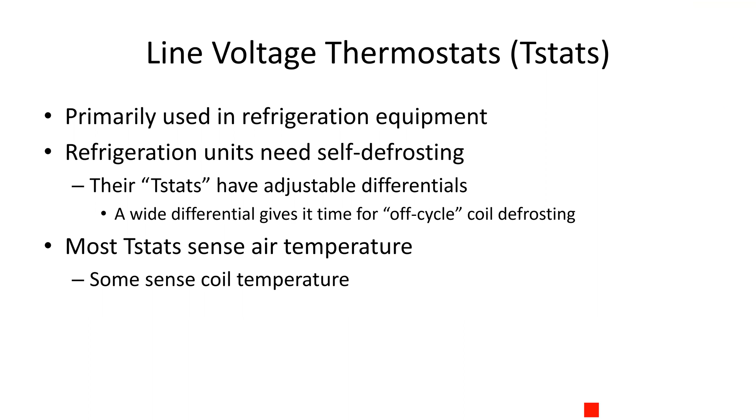So what it'll do is it'll cut in at 40. So once the temperature gets up to 40, it'll close and open your solenoid. And once it gets down to 35, it'll open that switch and disengage the solenoid, and then therefore pump down your compressor and all that good stuff.

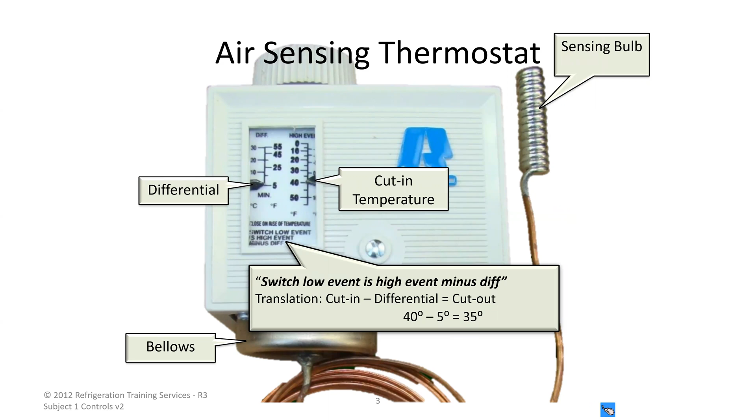And that's saying that the box is at 35 degrees? Right, so the 35 is the low event. So once the box gets down to 35, this will open back up and close your solenoid valve. Okay, so that 35 is box temperature. Well yeah, that's the low event, that's the cutout. So once the box gets down to 35, it'll open. Once the box gets up to 40, it'll close. So it's got a 5-degree swing.

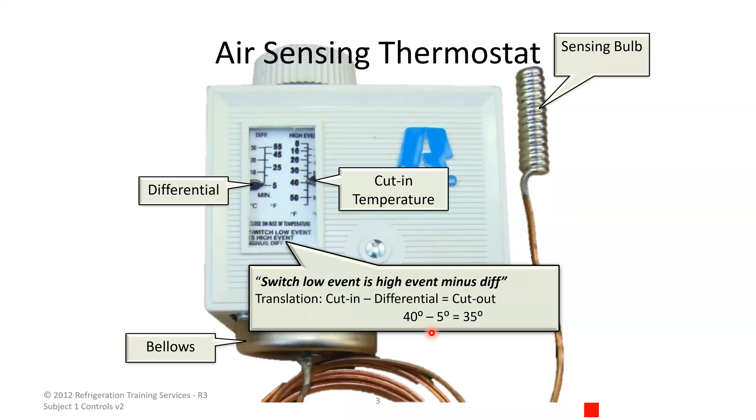Adjusting your commercial thermostat, you set the cut-in temperature first, or your high event, then you set your differential, and that gives you what your cutout is, your cut-in minus differential.

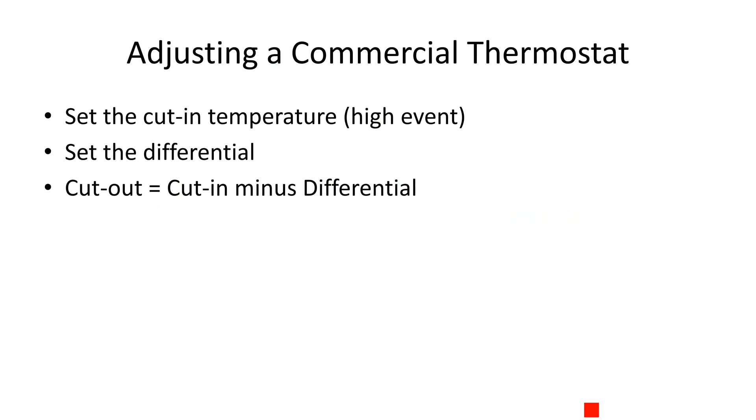An air sensing thermostat again here shows you kind of the slider, how they're setting it. Set that to 40 first, and then set your differential down to 5. And that gives you a 35-degree low event, so the box won't go below 35.

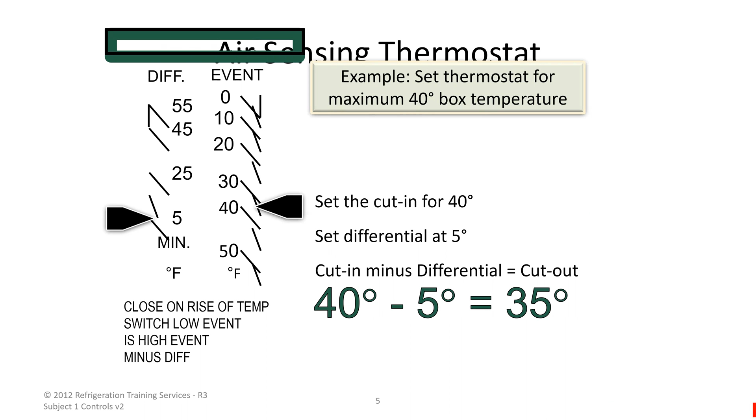This is a little diagram just kind of showing you the temperature swing. Goes from 40 down to 35, cuts out. And it's going to show you your evaporator temperature. Your evaporator temperature is usually about 20 degrees colder, 15, 20, something like that.

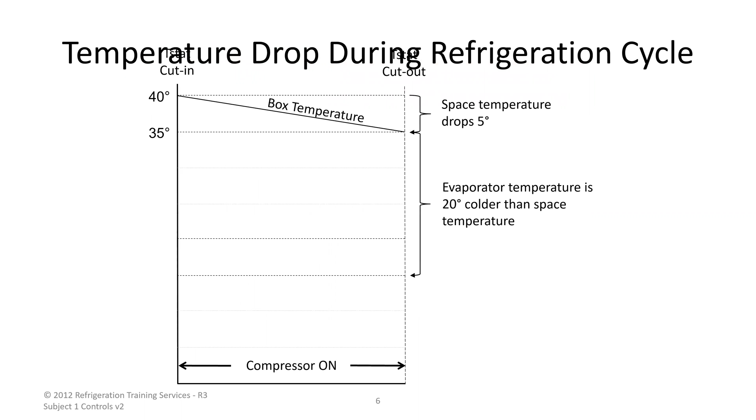Evaporator temperature drops with the space temperature. For an off-cycle defrost, it's typically what they use in medium temp, 35 to 40. When your compressor is running, the coil temperature is below freezing, remember, because it's 15 to 20 degrees lower than the box temp. So therefore, frost begins to build.

And when the compressor cycles off, in an off-cycle defrost, your fans will stay on, circulating the air through the coil. The coil rises above 32, and the frost will start to melt.

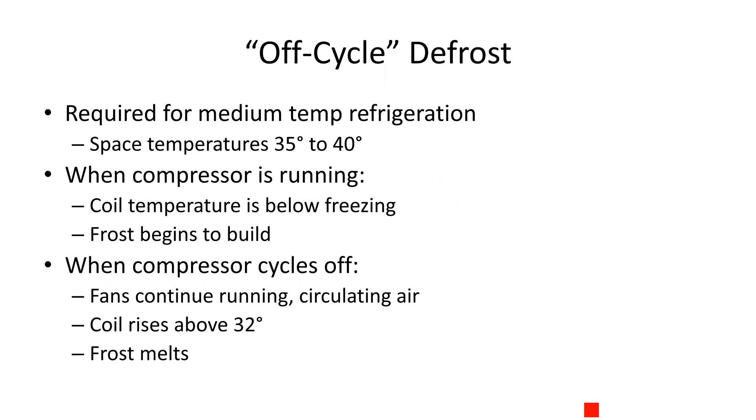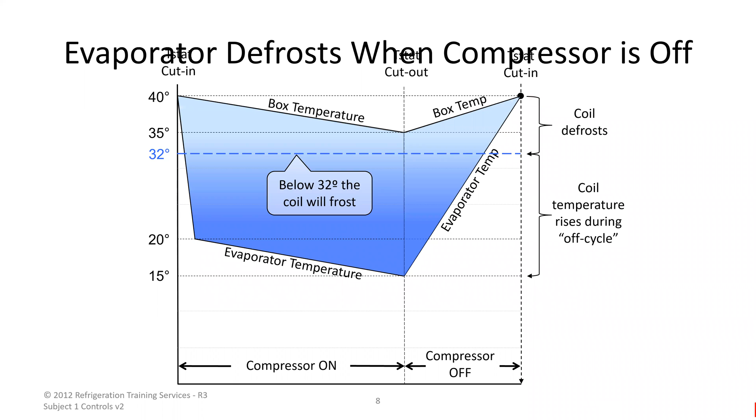This just shows you that same diagram we were looking at with the defrost side added onto it. 32 is the frost line. Below that, the coil will frost, compressor shuts off, temperature will come up, typically to about 40 to 45 degrees before the timeout, and then it will resume refrigeration.

Another style is a coil temperature sensing thermostat. The T-stat bulb is mounted in the evaporator fins, responds to the evaporator temperature, not the air temperature. Coil temperature drops as box cools, because there's less heat to remove, or less heat in the box.

Frost forms on your tubing, the T-stat shuts off the compressor, and the compressor stays off until the coil is defrosted. The primary advantage of coil sensing T-stats is it allows the coil to completely defrost before the compressor starts.

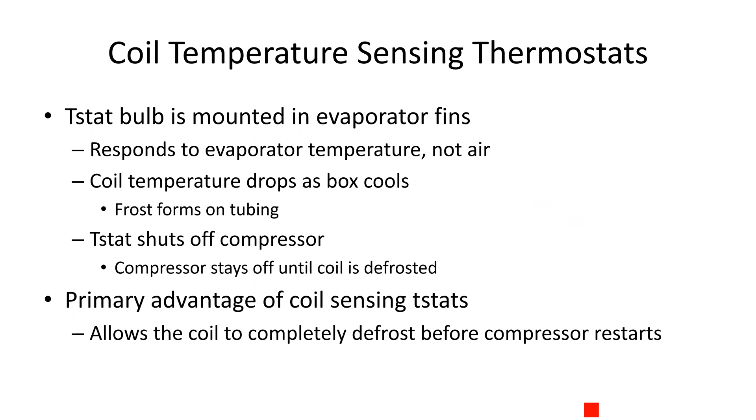And you know why they say that, why it allows it to completely defrost? Because with that bulb shoved in the coil, it's sensing the temperature of that coil, just like it shows right here. And it's not going to close again until the coil's warm enough, and there won't be any frost left on it. They are nice for that.

You'll see this, not this exact style, but you'll see some similar to this in a lot of our prep tables, condiment bars, that kind of stuff. We see it in C-stores and whatnot.

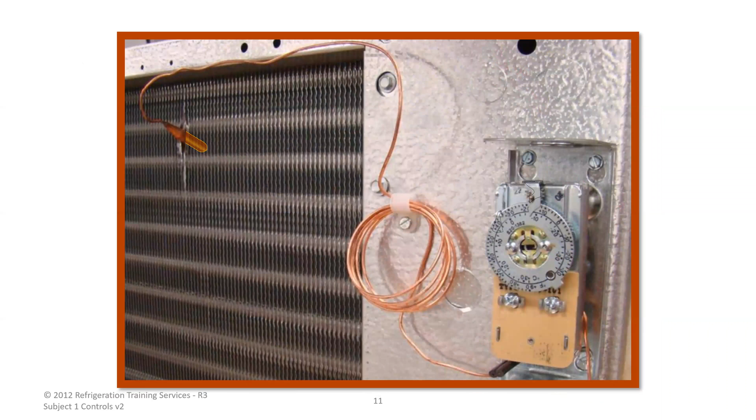Typically they're set pretty, you know, there's not really any adjustments you can make for the most part, other than just changing the temperature. The differential is usually preset in this style. This one, for instance, has got a 35-degree cut in and a 20-degree cut out. So once that coil gets down to 20 degrees, it's going to open that back up, shut, and close your solenoid.

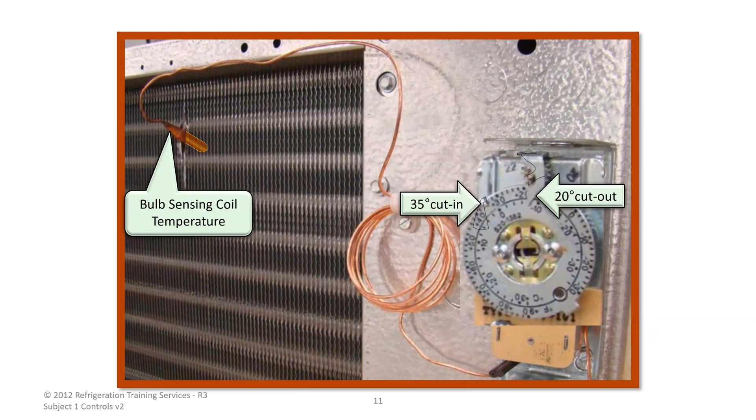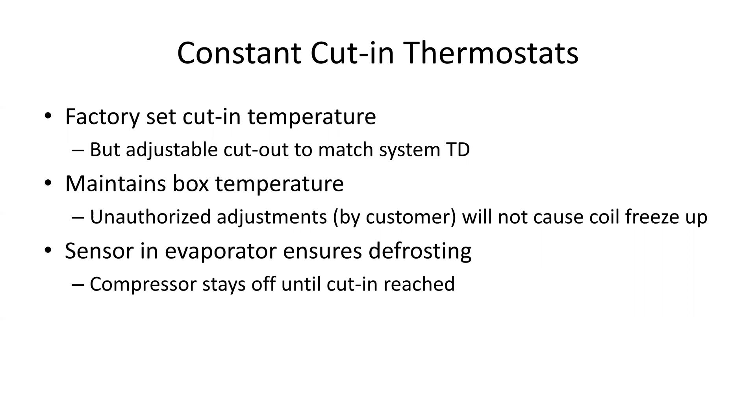A constant cut-in thermostat has a factory cut-in temperature, but it's an adjustable cutout to match your system TD. It maintains your box temperature, and when the customer goes in and starts turning that dial up and down, it's not going to cause icing issues because the high event is already set from the manufacturer. They do have an adjustment screw on some of them to change for altitude. If you're in a higher or lower altitude, you need to watch for that, since altitude changes the pressure in that thermostat, and if you don't adjust for your location, you can have some issues.

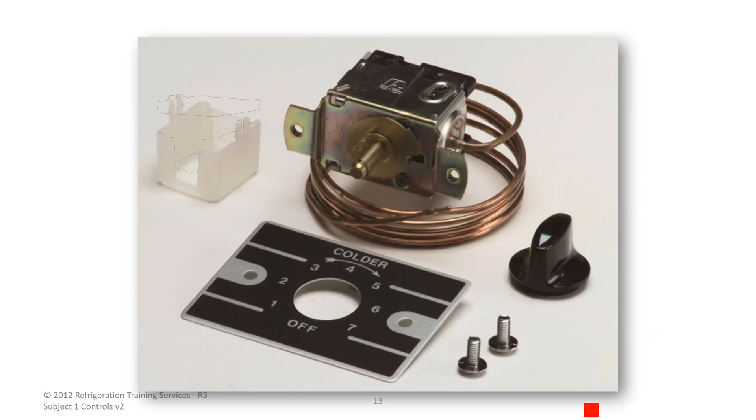How do you find out our altitude? How do you find out your altitude? Yeah, we have to Google it. Yeah, I would just Google it. Just Google what's the altitude in whatever city you're in. Okay, let me find that out right now.

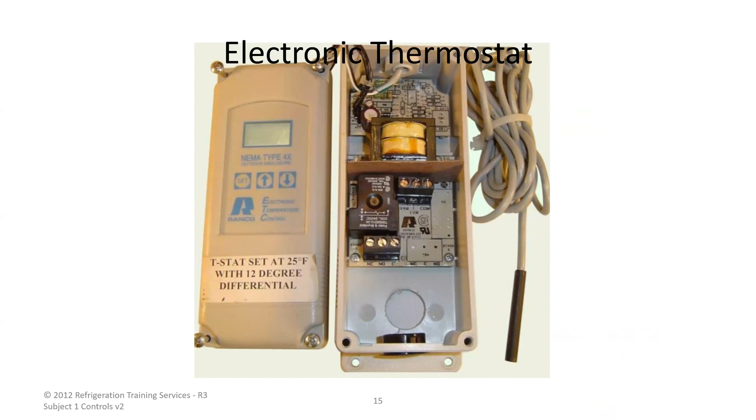These have a programmable differential in them, which you can set. Some of them have a programmable defrost in them too. If you're just doing an off cycle, you can set that up in here. These ones are pretty nice.

One thing I will say about these thermistors is if you ever want to check the accuracy of them, to see if it's reading the correct temperature, you can take that thermistor and get a cup of ice, fill it all the way to the top with ice and cold water, stir it around, and stick that thermistor right in the ice. It should read pretty close to 32, within a degree up or down.

If it's way off, you've got a bad thermistor, and at that point you just replace the whole thing. I have had guys in the past replace this thermistor with just a regular green lead sensor, but they're two totally different things. The green lead sensors are a 10K sensor, kind of a fixed thing. Whereas this thermistor is more like a 35 or 40K. So make sure we don't use those. If you're trying to troubleshoot that, just replace the whole thing.

Pressure controls stop and start the electrical current flow, energizing or de-energizing refrigeration components by switching the arrangement of pressure controls. You have two different types: an open on fall, which is your low pressure, low ambient fan control, or an oil safety switch; and an opens on rise, which would be a high pressure safety control.

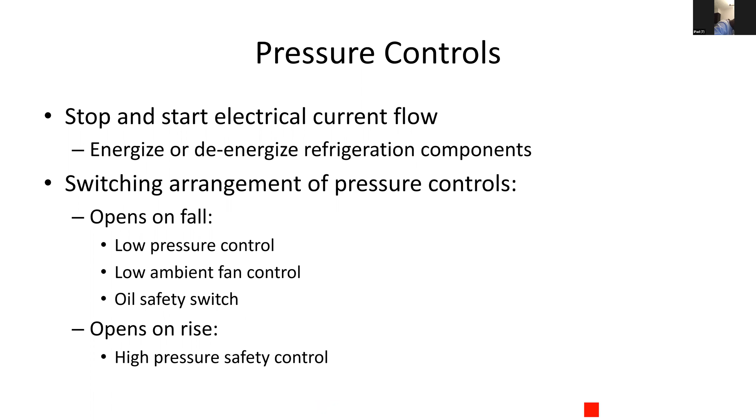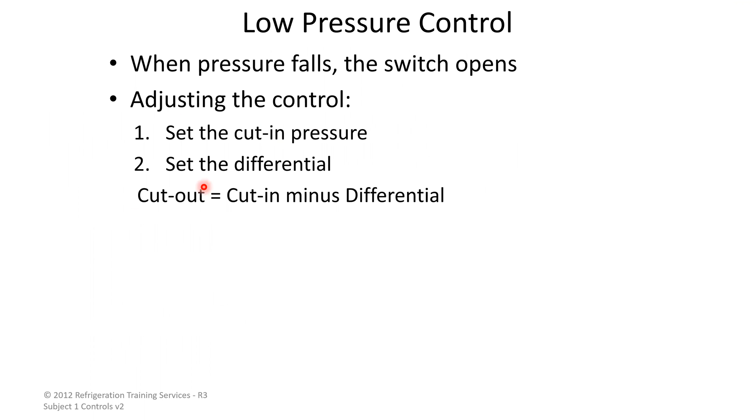So for a low pressure control, when the pressure falls, the switch opens. Adjusting it is just like that temperature control: you set your cut-in pressure and you set your differential. The cutout is your cut-in minus your differential. So if you take a look, yep, it shows it right here.

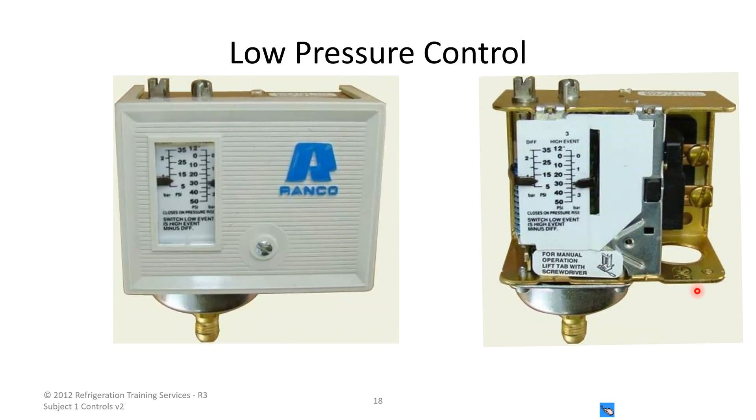Now, these aren't always 100% accurate. So if you're installing a new one or if you have an issue with one and you want to know if it's working correctly, the best way is to gauge up on your low side and then either valve off your receiver or your liquid line and pump it down, and actually look at your gauges and see what the compressor is shutting off at. You want to make sure it's accurate, and do it a few times to make sure it's the same every time. If it's shutting off at 20 pounds, then next time at 15, then next time at 25, you've got a bad pressure control, replace it.

Now, if it's shutting off at 15 on your gauges, but it should be shutting off at 20, but it's shutting off at 15 every time, that's fine. It's just this thing's a little off. So don't worry about that.

A lot of these low pressure controls in this style, if you look over on the left side underneath this spring, you can take your service screwdriver and stick it in there. You can actually do this instead of pushing in the contactor if you're trying to pump down a unit. So you can use this to pump down your compressor instead, just by prying that up with a little screwdriver — stick it right underneath that little spring and pop it up a little bit. It's another good way to easily tell if it's your low pressure control that's holding your compressor out or if it's something else.

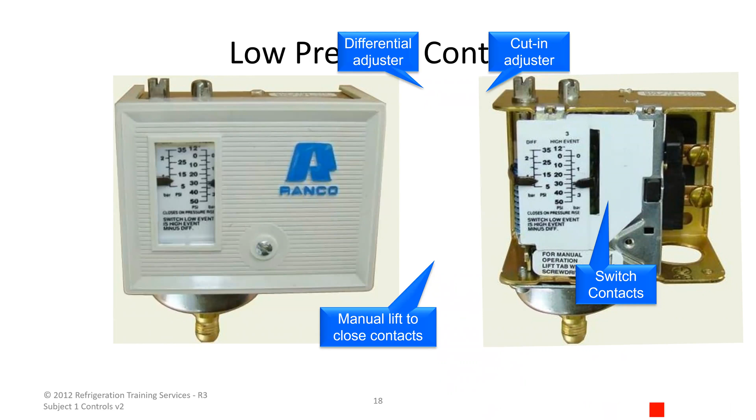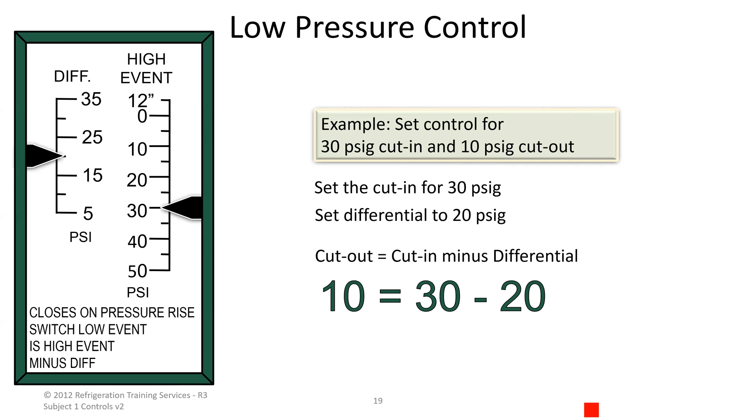This will show you a diagram of the low pressure control, setting it. You want to set the cut-in for 30, differential to 20. That's going to give you a 10 PSI cutout.

Setting your low pressure controls, you want to follow your manufacturer recommendations. If your cutout's too low, if you're pulling down into a vacuum or trying to pull it down to 0, when that compressor is not designed to do that, you can overheat your compressor and cause some damage. If your differential's too close, it's going to cause some short cycling. If you only have a 5-degree or 5-pound swing, that compressor is going to turn on and off a whole bunch of times while it's in defrost or satisfied on temperature, just because you have that too close.

Outdoor units are affected by low ambient. The cut-in must be just above your lowest ambient. So another thing you could go to Google for — just Google what's the lowest ambient in Salt Lake City or Phoenix or wherever — and you want to kind of go off of that.

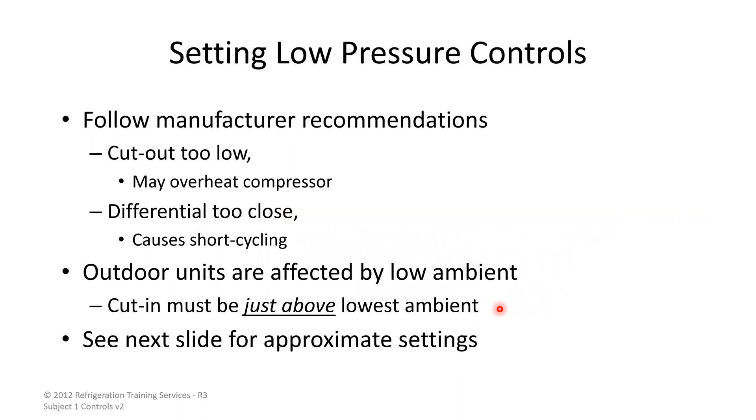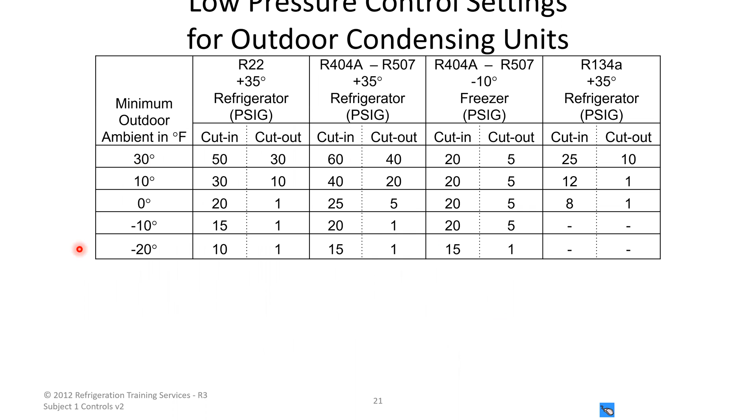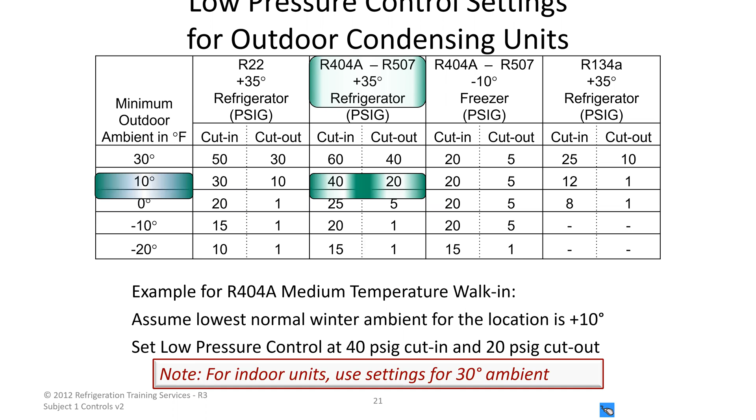Every low pressure control new in the box comes with one of these. If you don't have one, they're easy to find online. This is going to show you an example: for R404 medium temp walk-in with a lowest winter ambient 10 degrees above, positive 10, you're going to set that with your low pressure control at 40 PSI cut-in and a 20 PSI cutout. For indoor, you want to go with 30 degree lowest ambient, just because that's the highest one there is.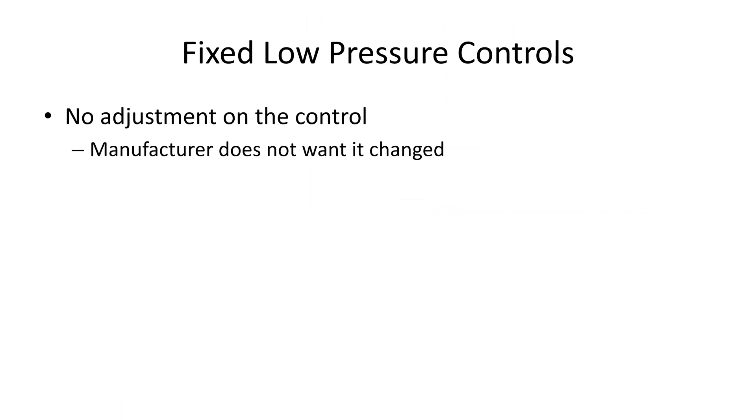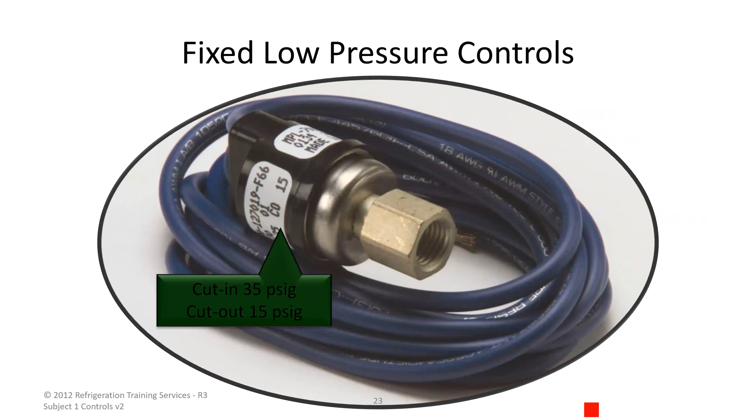A fixed low pressure control, or an encapsulated one, has no adjustment on the control. The manufacturer doesn't want it changed — it's just set for whatever it is. The only way to test these is to take the wires off of wherever they go to and test them for continuity. If you get continuity, that means it's closed and that's not your problem. They're preset, like I said, no adjustments can be made — it is what it is. I personally don't like these ones. If you have to replace a bad one, I would go get a mechanical one, unless you have one of these on your van, then go for it.

You can use low pressure controls also to control temperature, because in our business, pressure is temperature. Used on some indoor reach-in refrigerators. You want to check with your manufacturer for the settings, but the general rule of thumb, a control cut-in would be at a pressure equal to the desired box temp. And that's only if we don't have a stat on the truck and we just use that to control the temperature for the time being.

You only want to do this on indoor units. If it doesn't already have this type of control set up, don't add it. But some units use this to control their temperature — not very many, it's not very common. When you say control, you mean self-contained? Yeah, self-contained little stuff like little one-door reach-in fridges or something like that is typically what you see with no split.

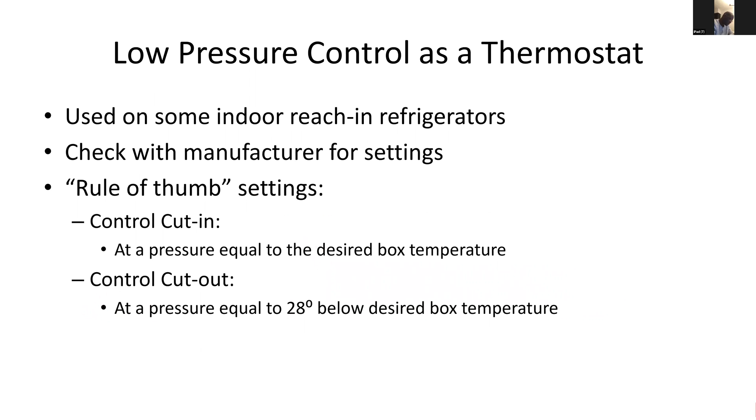It works kind of the same way, it's just using pressure instead of temperature. So at 33 PSI on 134, you're going to have a 38 degree box temp. Evaporator temp is going to be quite a bit lower, obviously. 12 PSI would give you a 10 degree evaporator. When the compressor shuts off, same thing, it just goes off of the pressure. Once the pressure gets up, it'll kick it back on.

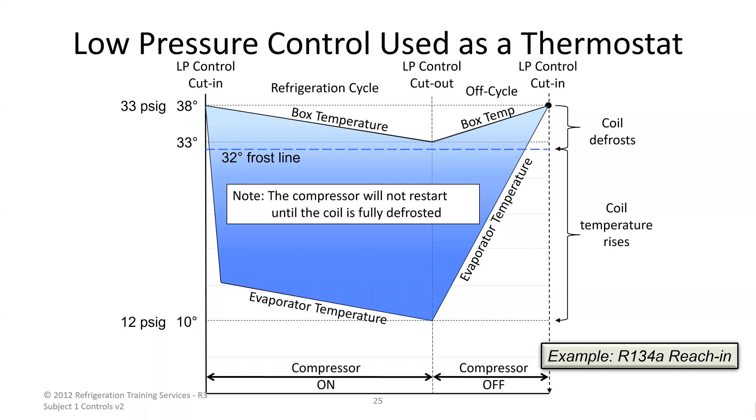Not very common, but they are out there. Benefits of using a low pressure control for temperature: one control, three functions. Controls the box temp, ensures proper defrost, and it's a low pressure safety for the compressor.

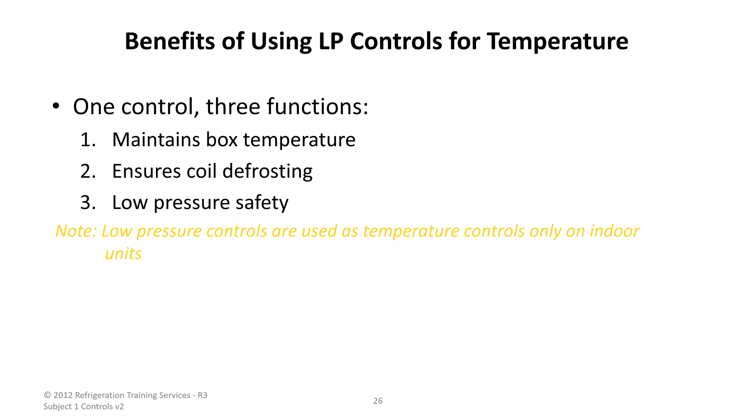Your high pressure control opens the compressor circuit on pressure rise. So setting your control cutout, you want to check with the manufacturer, or your rule of thumb is 155 degree condensing temperature. So R134, you'd be at 283 cutout, R22 you'd be 382, 404 you'd be 427.

But this is also very susceptible to where you live. Now up here, typically for 404, we have our high pressure safety cutout set for about 350 to 375. Now down in Phoenix and Vegas, where you guys are at, your temperatures are going to get a lot higher, so your pressures are going to be more in the 400 range.

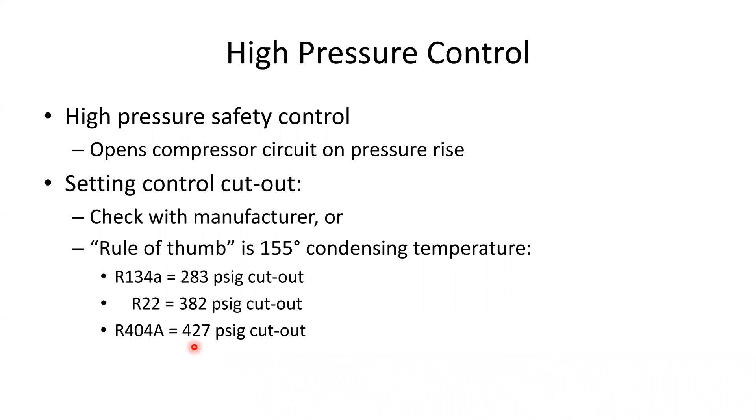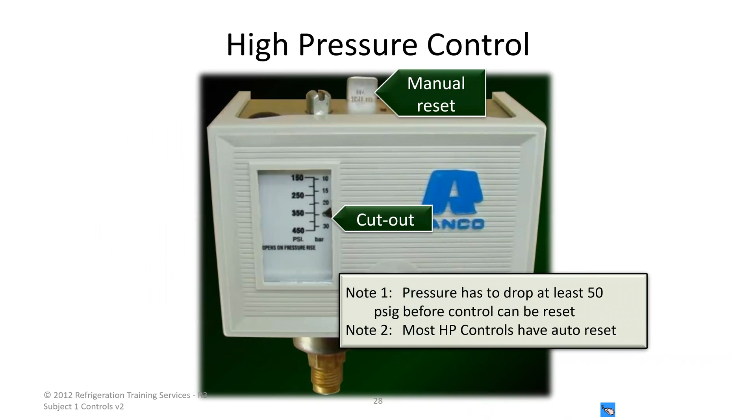High pressure controls, some of them have a manual reset, most are automatic. Typically they only have one slider on them. If it's just a high pressure cutout, they don't have a slider for the differential. You set it where you want it, and that's it.

You can test these things the same way you test the low pressure: gauge up to your high side, either disable your condenser fan motor, or you can take the top off of the unit and cover up the condenser to raise the pressure also.

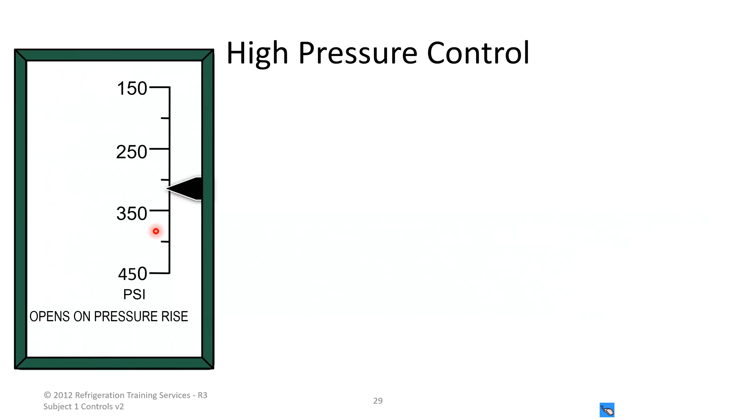If it's the middle of summer and it's 120 degrees outside, don't worry about it. Just set it where you think it should be, 350, 375, 400, and call it good. We don't want to try to raise the pressure when the temperature's already hot as hell outside. It's just causing unnecessary stress on the compressor.

Most of the automatic reset ones have a 50 PSI swing in them. So if I have my high pressure cutout set at 350, the automatic reset is not going to kick in until it gets down to 300.

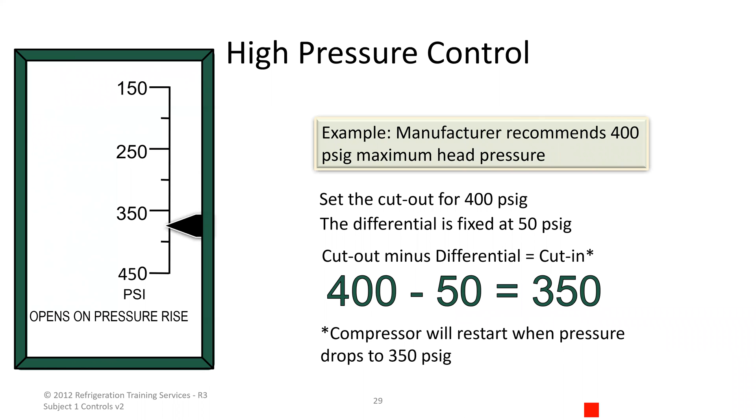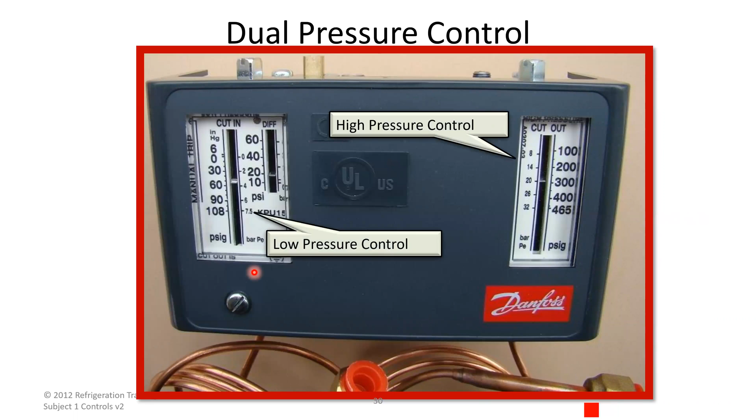Obviously, we want to go off the PSI side, not the bar. Low ambient is when your condensing temperature drops below 90. Why don't we want low ambient? It lowers your condensing pressure. Low liquid pressure affects your metering device. You get flashing, you get a starving evaporator, it can cause icing issues.

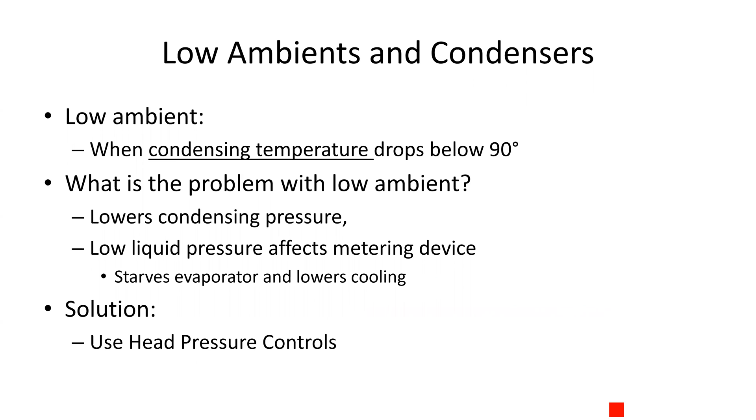If it's flashing out of your metering device, whether it be a TXV or a cap tube or something like that, the solution is to use a head pressure control, whether it be a headmaster or a fan cycling control. Dampers are an option, though you don't really see those. Flooding, we'll cover that on a later topic, flooded condensers.

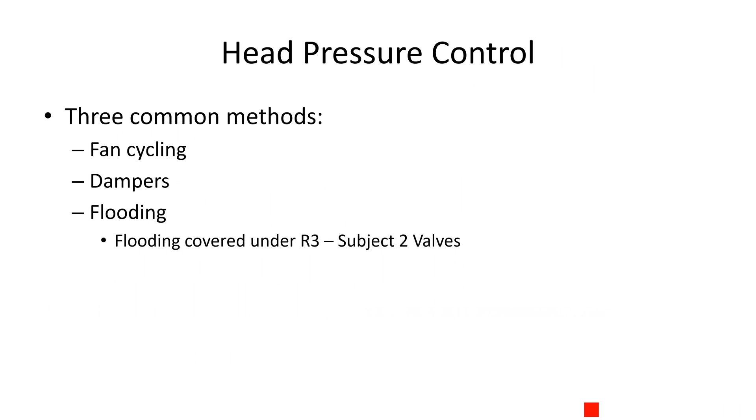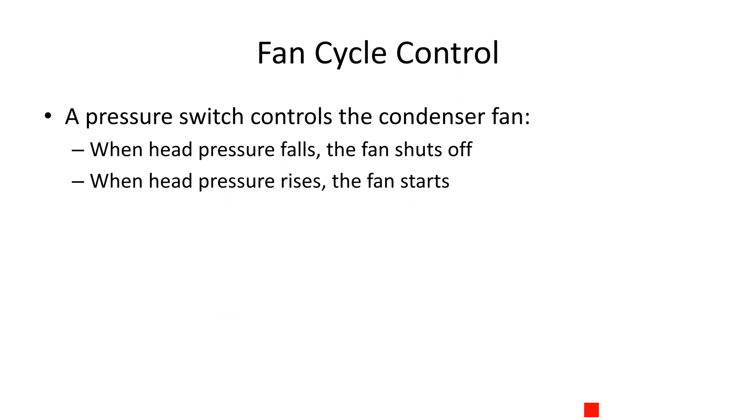Fan cycle controls is a pressure switch that controls the condenser fan. When the head pressure falls, the fan shuts off. When the head pressure rises, the fan starts. So instead of using a headmaster, in most applications you can actually use both, but typically you see one or the other. So when the head pressure starts to get too low, it'll cut the power to that fan to try to bring it up. And once it gets up high enough to where we want it, it'll give power back to that fan.

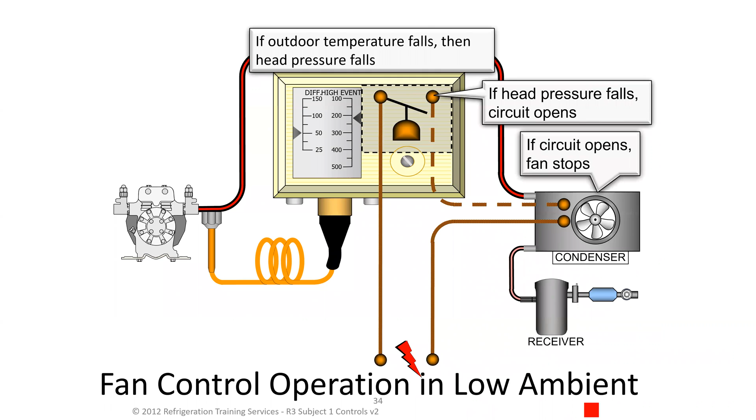Everybody following along with that? Understand how they work? Mm-hmm.

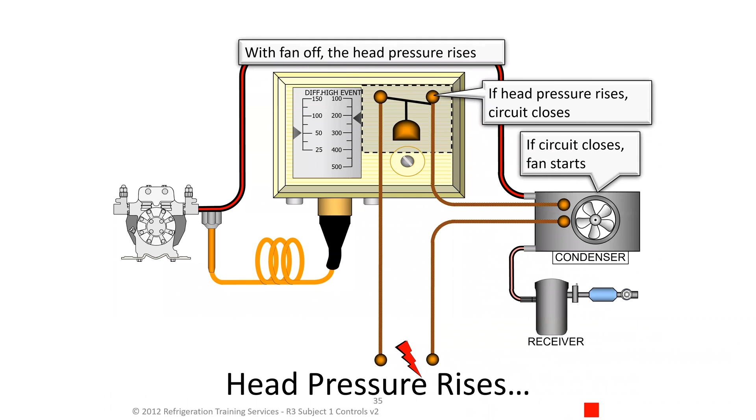Now, a fan cycle control and a head pressure control are two totally different things. One closes on rise, one opens on rise. You need to make very sure if you're replacing one or if you're going to install one. If you're getting it for fan cycle control, you want it to open on the fall, so that would be a close on rise. So when the pressure goes up, you want it to close so your fan will come on. If you put a high pressure control in there, it's going to do the exact opposite. When that pressure gets higher, it's going to cut power to your fan. And you'll be back there real quick.

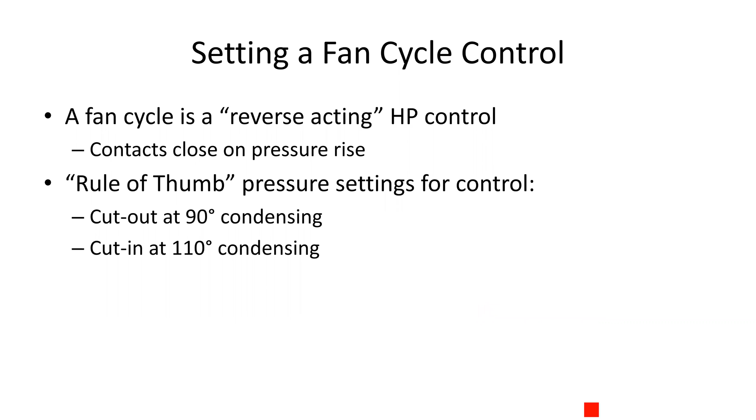Adjusting a fan cycle control is just like adjusting the others. You've got to know what you're dealing with, what kind of gas it is, what proper condensing temperatures and pressures are, what you want it set at. Your high event cut in for R22 is 225 or 110 degrees, and your low event is 170 or 90. That's the goal where we want to keep our condenser. It doesn't always happen that way, but that's what we'd like it to be. Everything we can do to help that is beneficial.

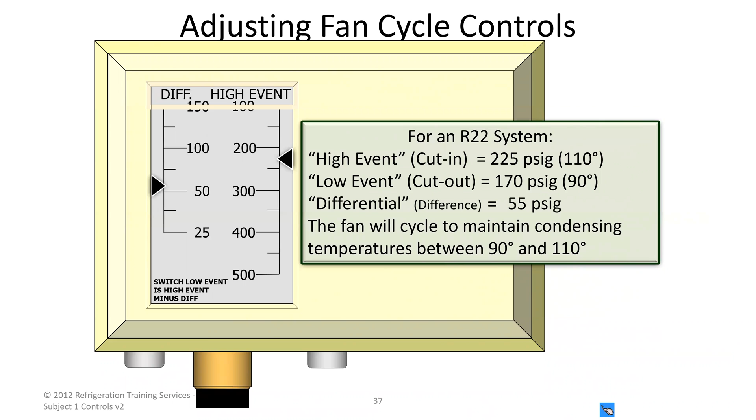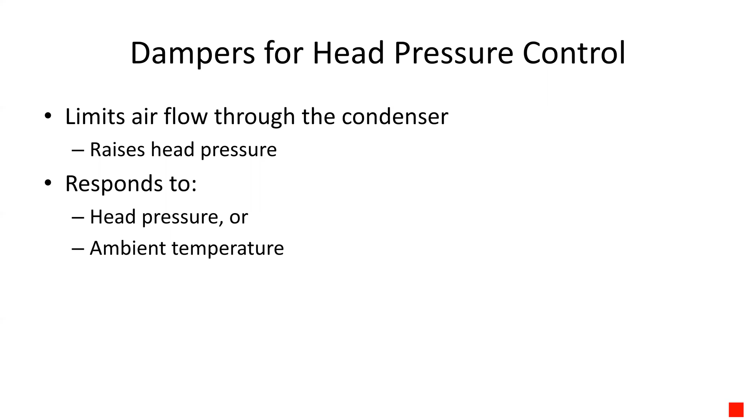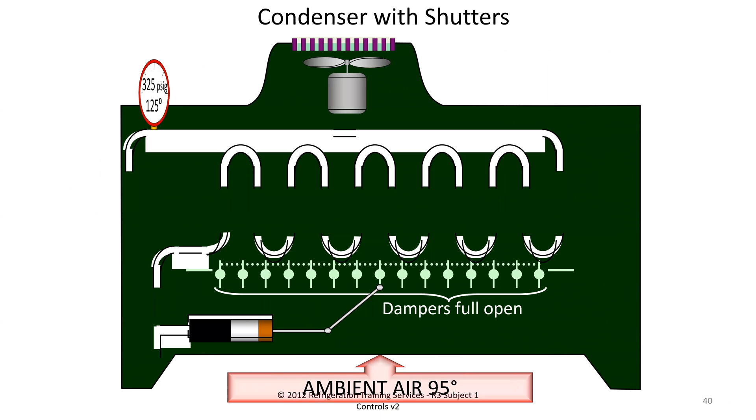Dampers for head pressure control are essentially like what I was just talking about, you can take the cover off of the unit and cover up your condenser. It's the same thing, these are just automatic ones. So these little things right here, when the head pressure gets too low, they'll turn and close. The fan stays on, this will just close and restrict that airflow. You don't really see these though, I think I've only seen one, and it was not in operation. It was at an old shop.

You guys, what about you, Selvin, or anybody else out there? Have you seen one of these before or dealt with one? Now that I think about it, I've never seen one.

Yeah, they're not really common, they don't make them anymore. They're not doing this anymore. Nowadays, things are going to modulation. They're changing, instead of turning things off and on or a fan cycle control or dampers, they're doing variable speed motors or ECM motors.

A VFD, or variable frequency drive, is what they're using now. They'll speed up and slow down the condenser fan motor instead of starting and stopping it, for two reasons. It's a lot better for the motor, a lot less wear and tear. It's a lot easier for it to slow down and speed up than it is to start and stop, and energy consumption.

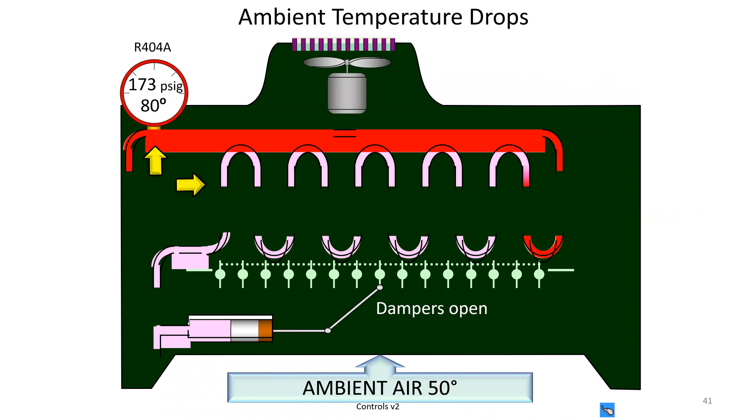It uses a hell of a lot less power to just speed it up a little bit than it does to start a motor, especially some of these big ones you get, where the fan's like a 2.5 foot diameter fan blade.

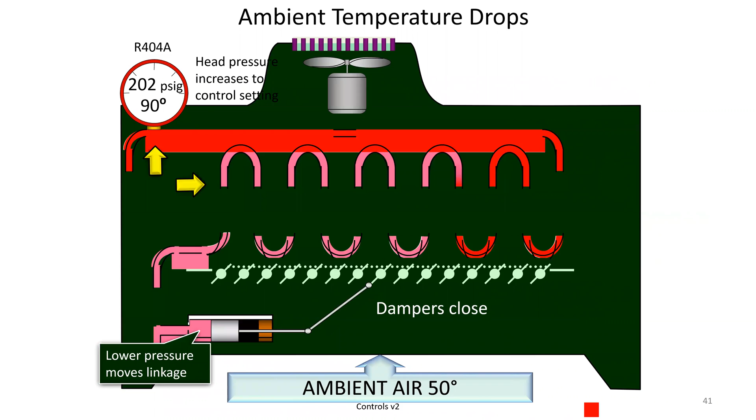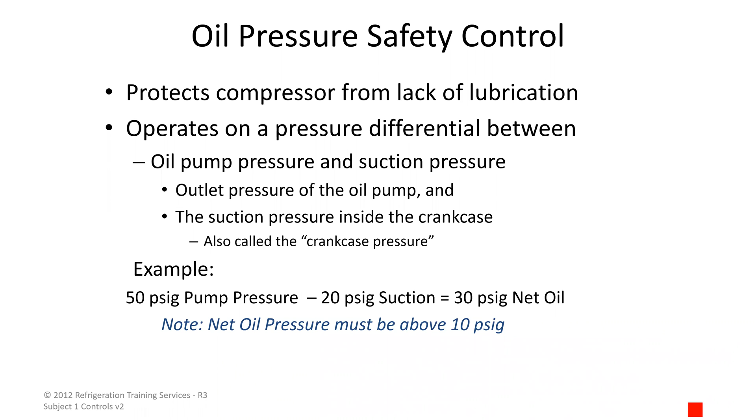So anytime you're working on a compressor rack or something, and you call Jim or me or Eric or Selvin or whoever for help, that's probably going to be one of the first things they ask you if you're dealing with oil problems, is what's your oil net.

The easiest way to check that, you see this is your oil pump here on the front of the compressor, and right here you have a little T coming off. Now, one of these has a strainer, the other does not. Just loosen the cap a little bit, it's usually this one that doesn't. You just take that cap off, hook up your low side gauge to it, hook up your other gauge to the back side of the compressor on the suction, and you should have at least a 10-pound difference between the two. This should be at least 10 pounds higher than your suction pressure. You really want it to be more like 30.

Okay, so pump oil pressure should be higher than suction pressure at all times. Right, yep, on a rack, on a compressor.

Correct. And the reason we check the oil net, because it tells you quite a few things right off the bat. It tells you if the pump is turning, for one, and then it also tells you if you have a plugged inlet screen, or pickup screen, in the bottom of the compressor, or on the oil pot. This one doesn't have a picture of it, but usually on this side or on the other side, you'll have a little oil pot with a float in it, and based on the level of that float, it opens and closes and lets more oil into the compressor. There's also a box they have on the side. Right, yep, there's also another screen on the inlet side of it that can get plugged as well.

So a couple easy things to check, and you can pretty much tell which one it is just by checking your oil net.

These oil pressure controls are a little outdated. They're not really around anymore, but on some older stores you might see them. This is typically the one we see, the Sentronic or the Sentronic 2.

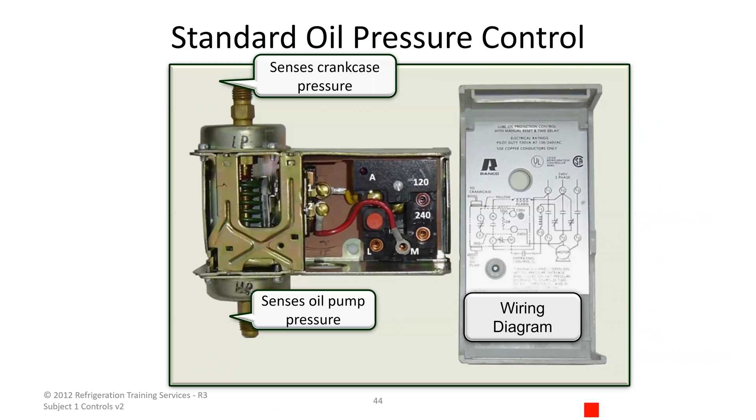There's a couple different variations, but you'll see this big brass nut sitting right there. Let's go back to the compressor. You'll see a big brass nut poking out of the side of the oil pump, right about where that T is, just below it.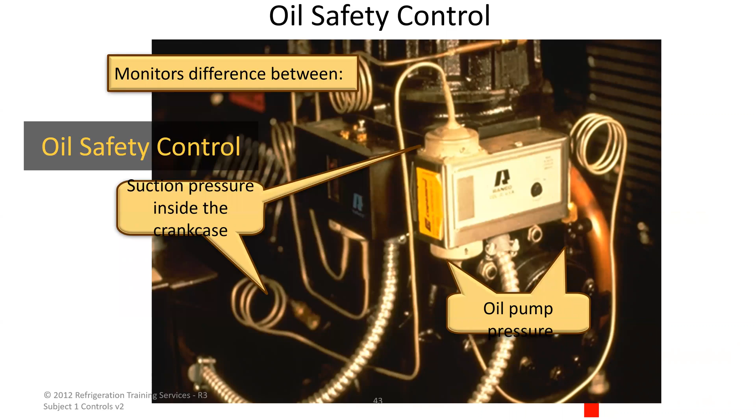And that's called a sender. That takes the pressure between the oil pump and the body of the compressor. So that does everything that other one's doing, just right here.

And they have a push to reset. If you show up to a store and you have a compressor off on oil fail, do not push the button. You've got to check some things out first.

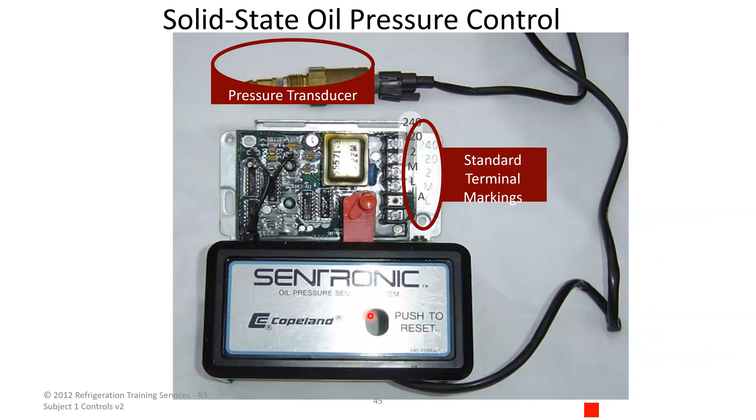If you just go in there and push the button and that compressor's been off for 3 or 4 hours and the valve's still open and it's dumping liquid into that body, as soon as you push that button the compressor's going to start up. And if that crankcase is full of liquid, you're going to grenade that thing, breaking all kinds of stuff inside, valves, the crankshaft, anything. Liquid is just bad for compressors.

If your net oil pressure drops below 10 psi, there's contacts inside that Sentronic that close to start a timer. If that low pressure continues for the length of the timer, 120 seconds, the control circuit will open. That stops your compressor and closes an alarm contact.

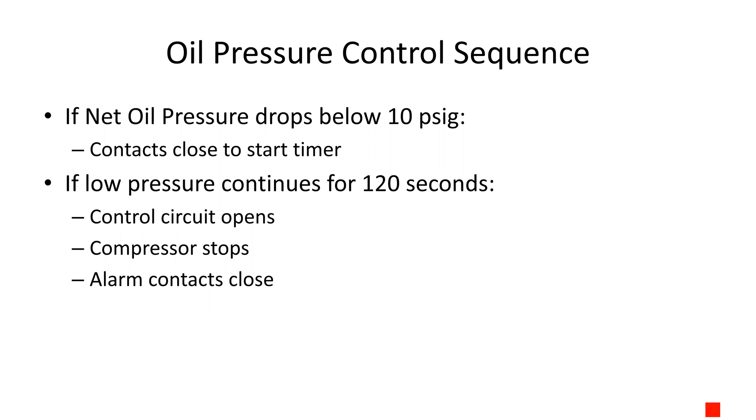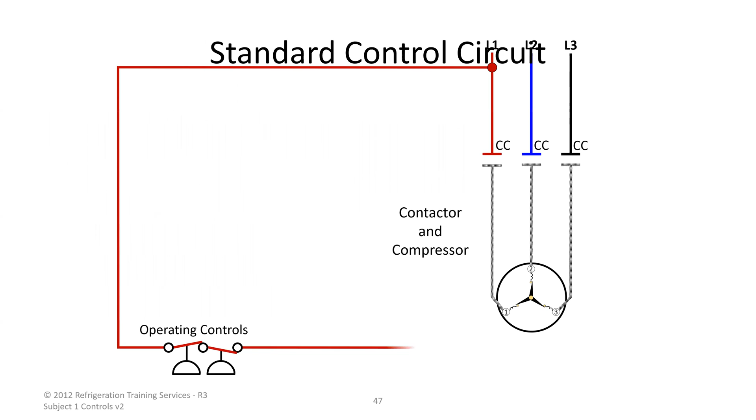Whatever you're dealing with, whether it's CPC or Micro Thermo or Novar or whatever control system it is, they all do the same thing. It just has a little contact in there that closes when that timer times out and sends an alarm signal out to tell you you have an oil fail.

An oil fail on one compressor is not really going to affect much on a big rack system. But if you have multiple compressors going off on oil fail, those are some of the hardest problems to diagnose, is oil issues.

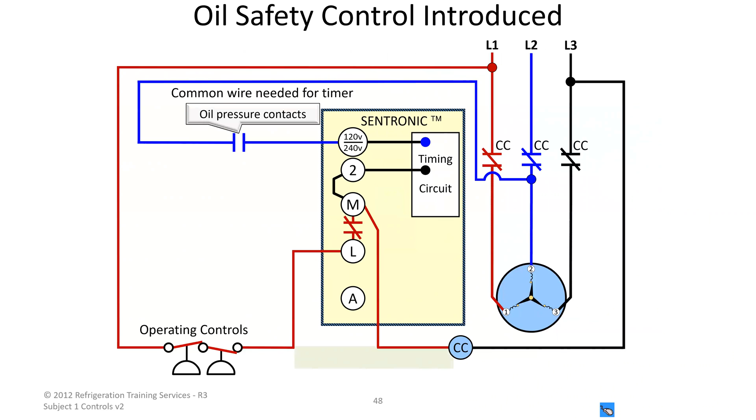This just kind of shows you a little diagram of how it works on the inside. Pressure gets low, contact closes, starts the timer. If the timer times out, contacts open here, kills your compressor. Compressor shuts down, alarm contacts close, the alarm goes off.

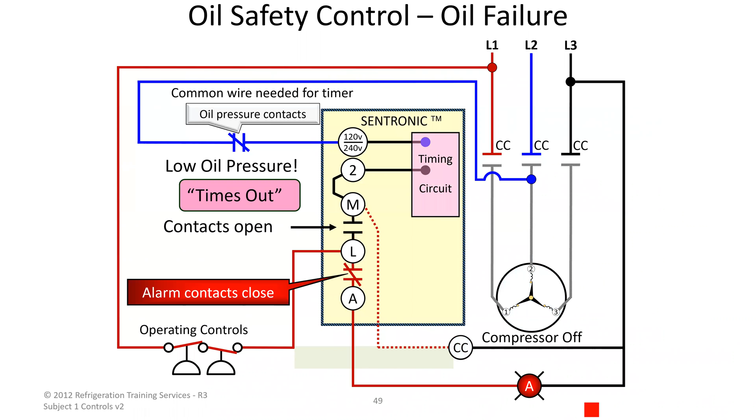A lot of nuisance trips on oil fails are due to brownouts or low voltage, or you lose a leg or something like that. The compressor will go off on internal overload, but the oil safety control still has voltage. The control times out and trips because the compressor is off and there is no oil pressure.

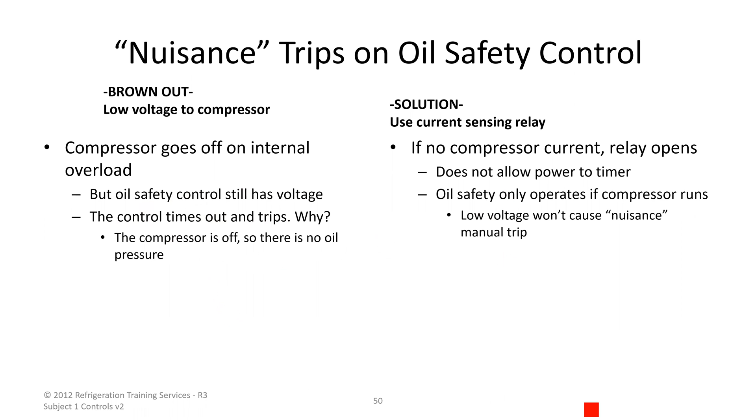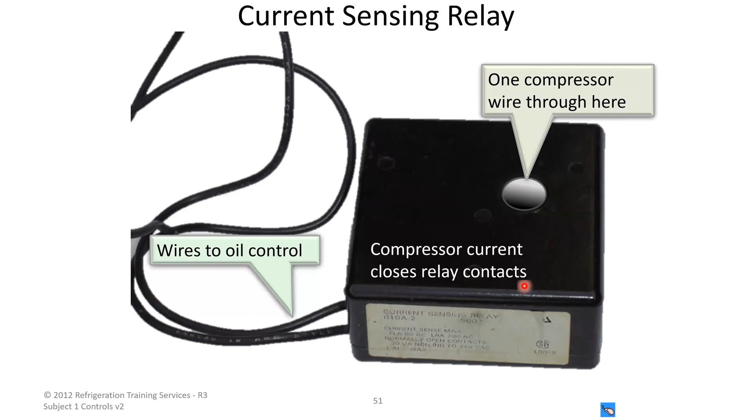The way to stop that is there's a current relay, or a CT, whatever you want to call them, that can be installed with the Sentronic. You run one wire of the compressor through it. As long as it's drawing amperage, it closes some contacts. You wire that in there.

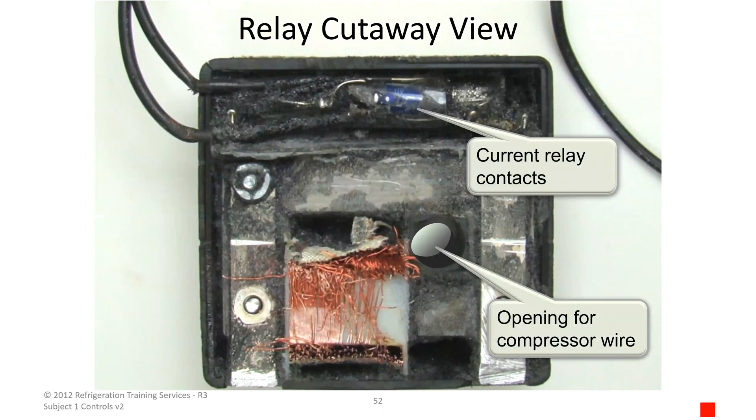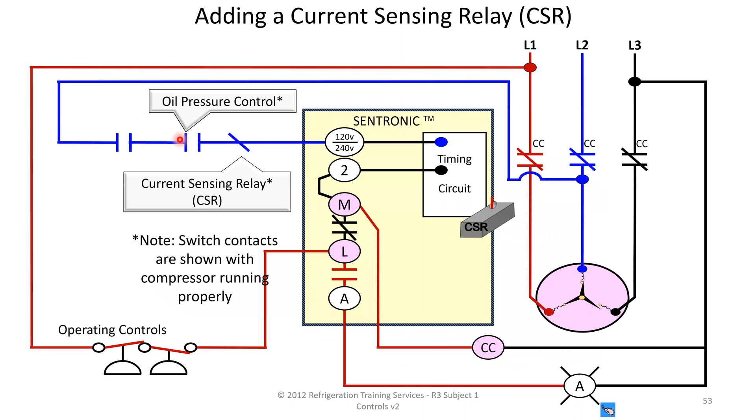It's not going to get to that slide for a second. There we go. So you wire it in right here, goes in with your pressure leg. So it's got the oil pressure control here. If that closes because there's no pressure...

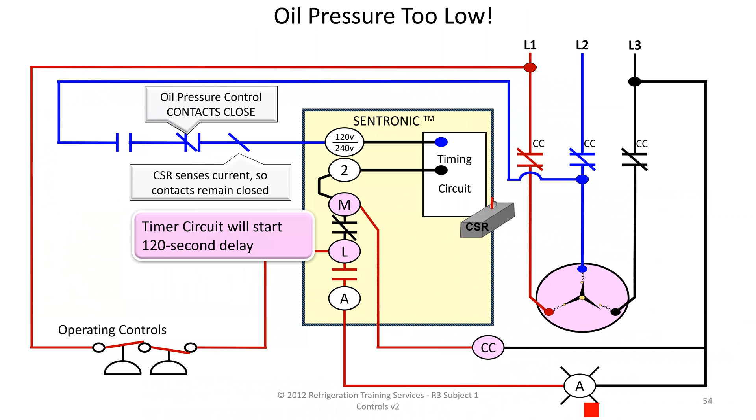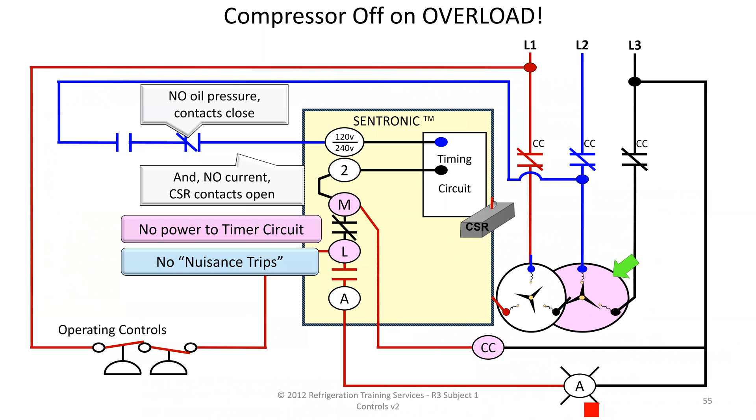The CSR senses the current, so the contacts remain closed. If it doesn't sense the current, off on overload, no oil pressure, contacts close, and no current, then these contacts will open and not let it start the timer. So it does away with a lot of the dumb calls where they just had a power bump or an outage or something, and you have to go in and reset all these oil safeties because they tripped.

Let's see, we got some time. Not really.